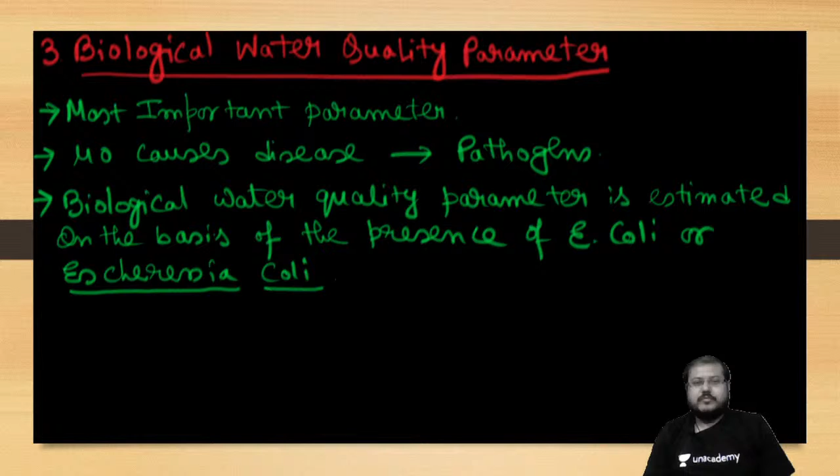एंड सेकेंडली एक पॉइंट है कि अगर इकोलाई जैसा दोस्त इस सैंपल में है, तो दुश्मन कोई भी रह सकता है। वाटर इज फिट या नॉट फिट फॉर ड्रिंकिंग। एंड थर्ड एंड मेजर पॉइंट इज, अगर आप पानी का टेस्ट करेगा डिफरेंट माइक्रो ऑर्गेनिज्म के लिए, वो चीज उसके लिए भी खतरनाक है। Any touch or anything can happen, and it can cause that the pathogen has entered the body of that particular person and he or she is getting infected by that pathogen. इकोलाई टेस्ट करने में नेगेटिविटी है ही नहीं, क्योंकि E. coli is friend to mine and ours, and friend to our body itself.

There is a definition of E. coli present. E. coli is coliform, facultative, non-pathogenic, gram-negative, rod-shaped bacteria present in every warm-blooded animal intestine. Presence of E. coli is actually indicating that the water may get infected by microorganisms.

That is why E. coli is also called as indicator microorganism. The presence of E. coli is indicating whether other microorganisms are present or not. That's why E. coli is also called as indicator microorganism. So lot many properties are provided here.

Now see, coliform, facultative, non-pathogenic, gram-negative, and rod-shaped bacteria. So lot many properties are present. So let's see, first of all, coliform.

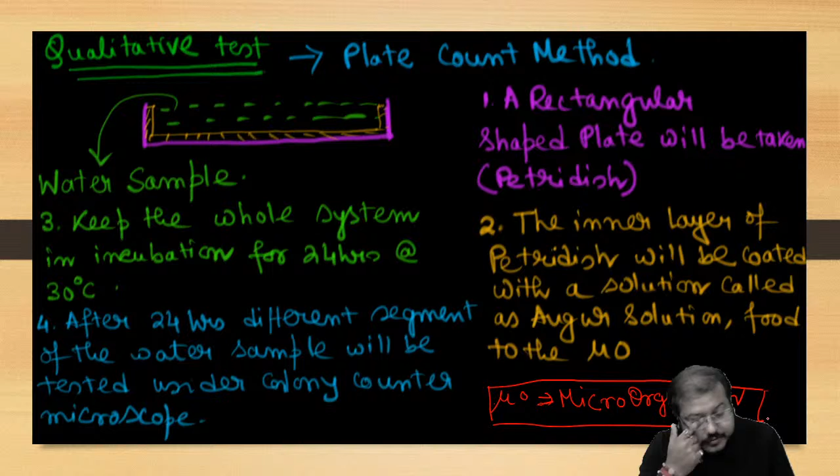That is called agar solution. Then after that, we put in the water sample which we want to test.

Then we keep the whole system in incubation, meaning an undisturbed condition, for 24 hours at 30 degrees centigrade.

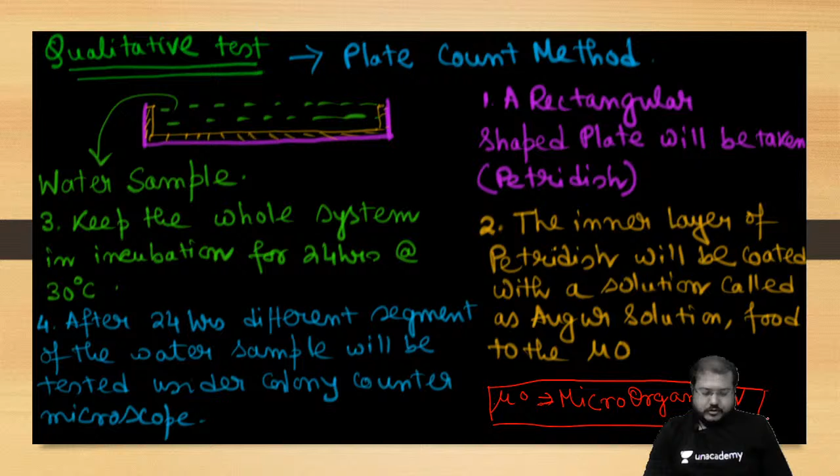In that colony counter microscope, if you observe any kind of dot - blue, black, purple, or brown - then your answer is yes, E. coli is present in the system. If no dots are present, then your answer is no, E. coli is not present in the system.

So: blue, black, purple, brown dot observed means yes, E. coli is present. No dots observed means E. coli is not present. That is the qualitative test.

Generally, the quantitative test of E. coli - try to understand this in detail, because you will get questions from the last segment of this test. If you don't understand the process, solving the question will not be simple. In the quantitative test, it is done by the multiple tube fermentation test.

What is multiple tube? Why is it called the multiple tube fermentation test? I will tell you.

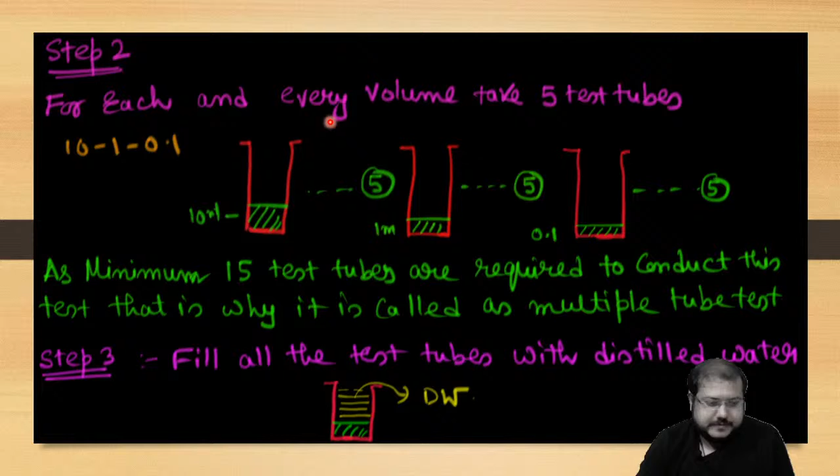Minimum 15 test tubes are required to conduct this test. And that's why it is called as multiple tube test. Why it is called as this fermentation test, I will tell you later. But minimum 15 test tubes are required to conduct this test. That is why it is called as multiple tube test. Okay, that is step. Is that clear?

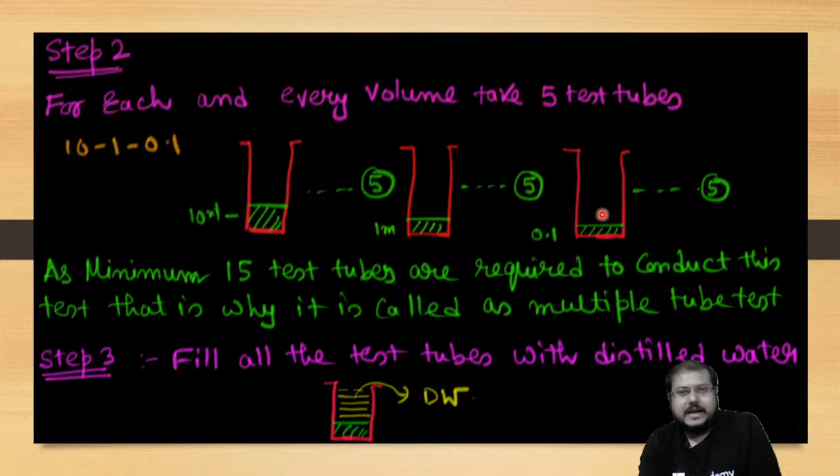Distilled water, 0.1 ml sample means 99.9 ml will put distilled. Clear?

Now, after that, each and every test tube, we are going to add 4 to 5 drops of fructose solution, mixed in each tube, and the mouth part will be closed by cork and Vaseline.

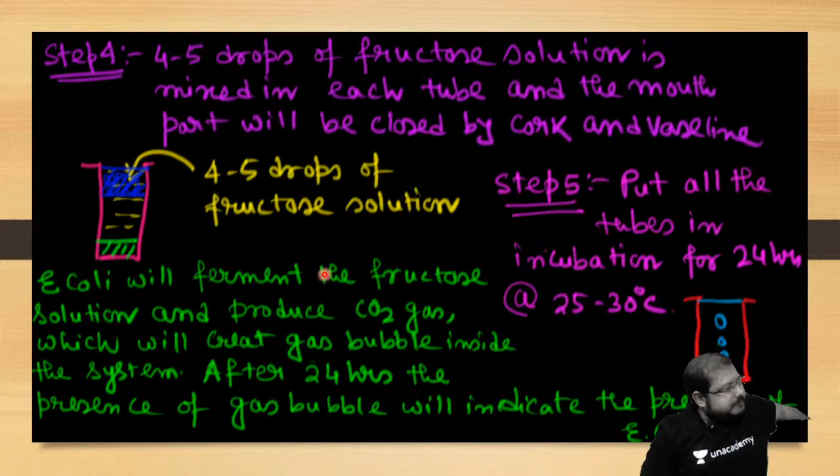In every test tube, 4 to 5 drops of fructose solution will be added, and after that the mouth part of the test tube will be closed by cork and Vaseline. Here.

Finally, what will happen? We will keep all the test tubes in incubation for 24 hours at 25 to 30 degrees centigrade. 25 to 30 degree centigrade.

What will happen? E. coli will ferment the fructose solution and produce carbon dioxide gas.

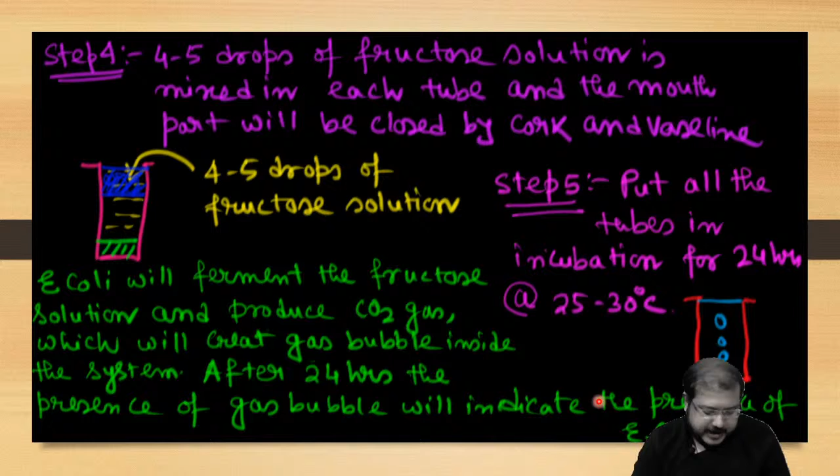These gas bubbles actually indicate the presence of E. coli. So after 24 hours, in the test tubes where we observe carbon dioxide gas bubbles, E. coli is present, else E. coli is absent in the test tube. Clear? So in multiple tubes, we are actually enhancing the fermentation, and we are finding out whether E. coli is present or not.

That's what is called as multiple tube fermentation test. Now, the final step, a table will be generated, a result representation table, to showcase the result.

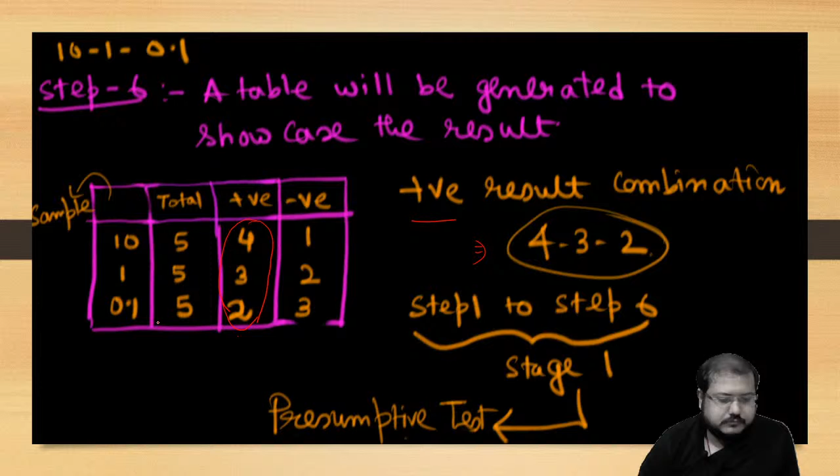That is a number. What is the highest possible permutation? That is 555, and lowest possible is 000. So in this table you need to find out where is your positive combination value. Here is 432. Suppose the corresponding value is 100. So your final answer will be represented by most probable number, MPN.

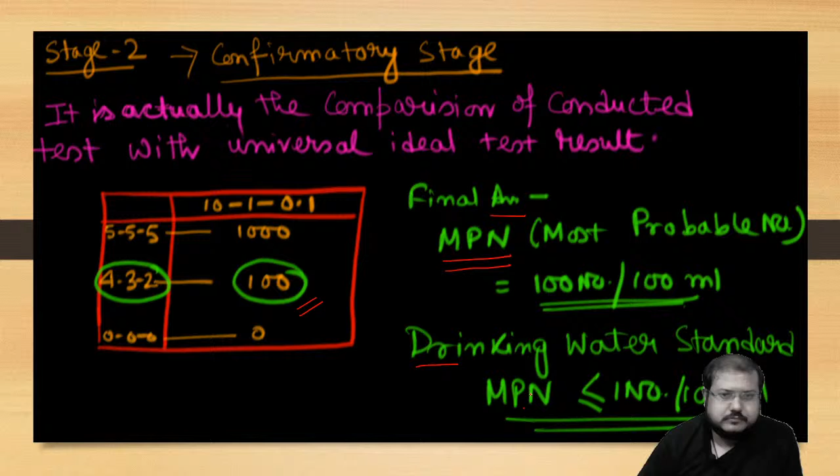Now, we need to understand two special cases. First is when test volume is not matching with the table volume.

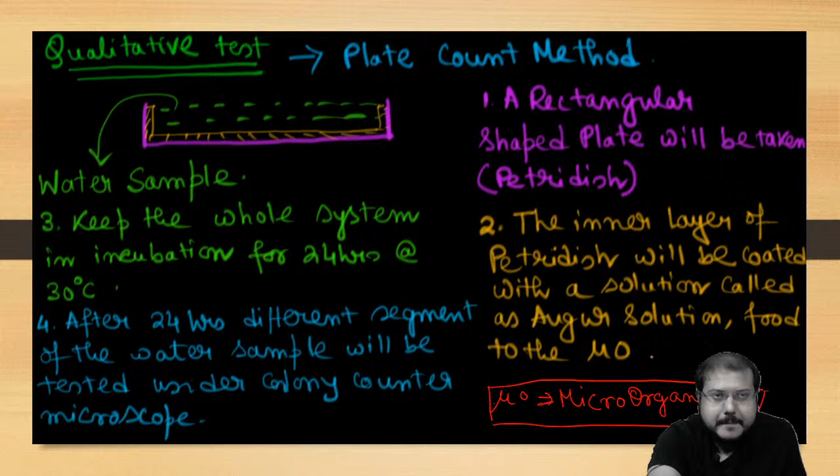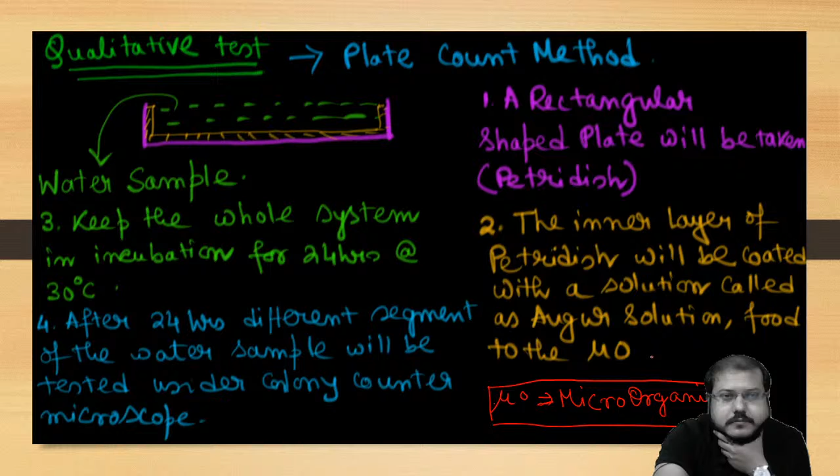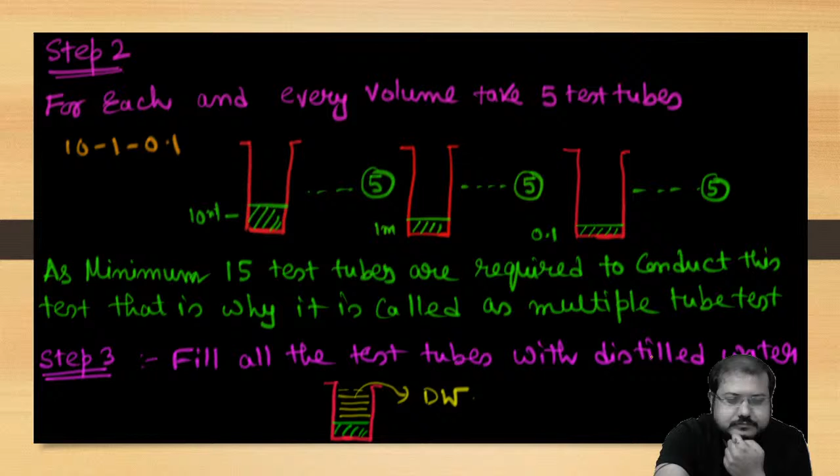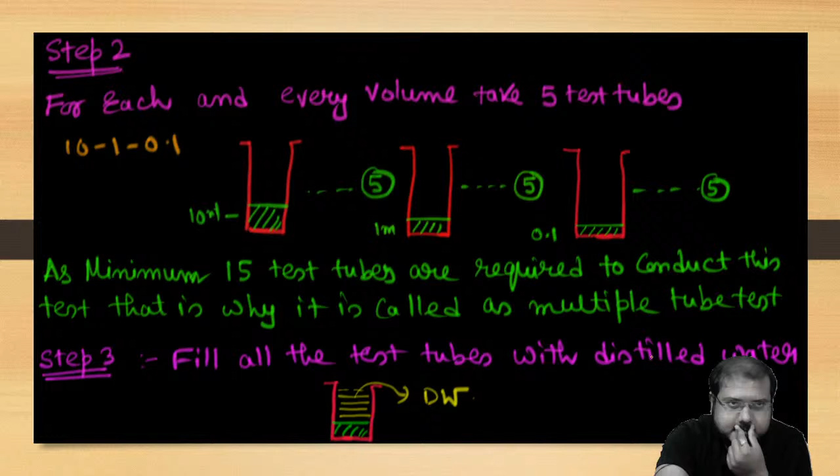That is what we have covered. Just going for the first ones: biological water quality parameter. We are going for the test for E. coli. What E. coli is, is described here. Then the properties are described here. What is the quantitative test? Confirmatory stage of the quantitative test.

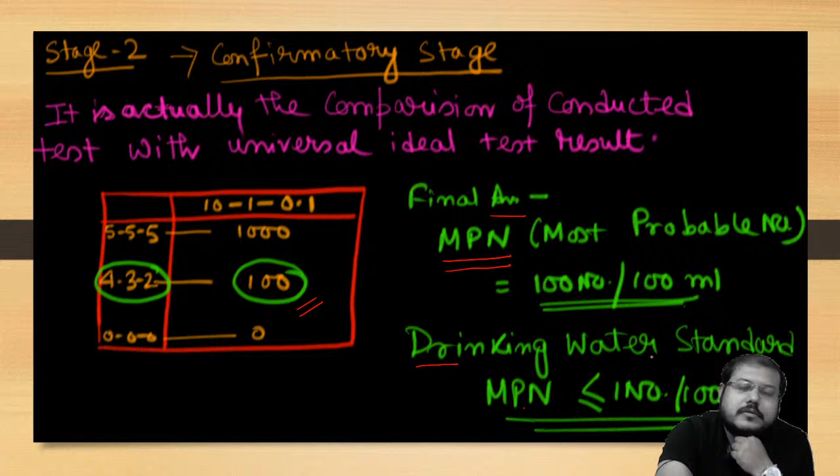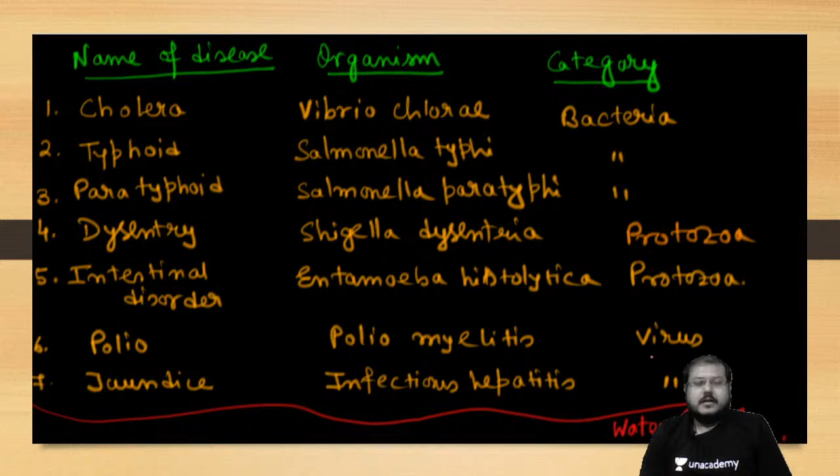Now, finally, there is a list of the disease, organism, and category. Cholera, Vibrio cholerae, category bacteria; typhoid, Salmonella typhi, bacteria; it's not all, just the normal ones. Paratyphoid, Salmonella paratyphi, bacteria; dysentery, Shigella dysenteriae; protozoa, intestinal disorder by Entamoeba histolytica.

Polio is caused by poliomyelitis virus, jaundice is infectious hepatitis by virus. These are a very small list of waterborne diseases, organisms, and their categories. That is the end of biological water quality parameter.

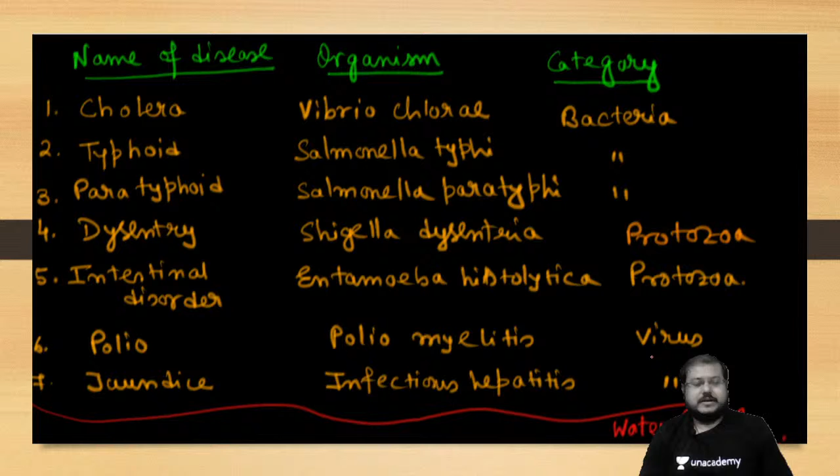Now we will start discussing the main topic for today, that is treatment. We will start the treatment of water. Quality checking हो चुके हैं. Now we have to treat the water, and the first thing we will go for is the plain sedimentation process. Before going to the plain sedimentation process, we need to discuss the prelude of this chapter.

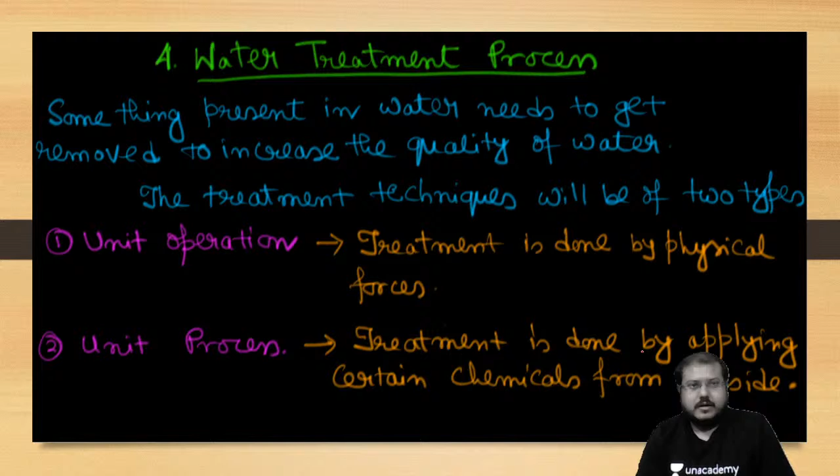Another one is unit process, where the treatment is done by applying certain chemicals from outside. We will see different treatment techniques and identify which are unit operations and which are unit processes. तो हम लोग treatment में घुस चुके हैं. That is a major segment; lots of things are there. The theoretical concept is important as well as the mathematical. So something present in water needs to get removed to increase the quality of water. The treatment techniques will be of two types: unit operation and unit process.

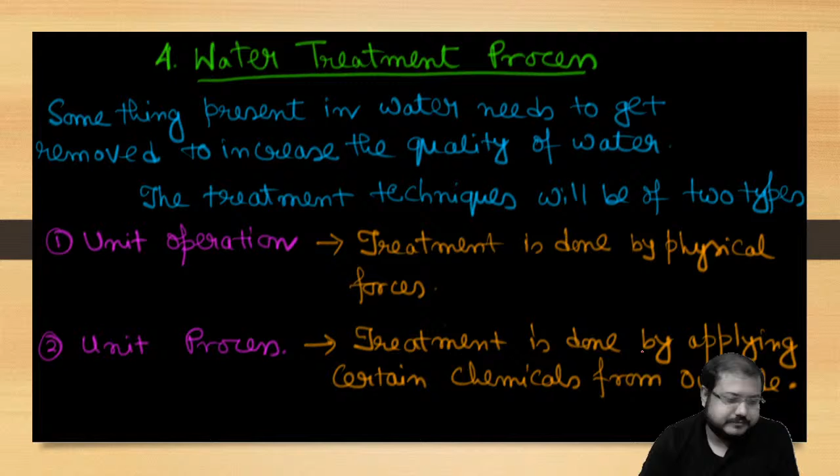Now, before going to the details, हम details में जाने से पहले कुछ चीजें हमको याद रखना पड़ेगा: that we are more concerned in the domestic water supply part. We are more concerned about the quantity than the quality.

अगर हम क्वालिटी को कुछ जगह पे नजरअंदाज करेंगे, क्वालिटी को कंप्रोमाइज करेंगे for a better quantity treatment, or we can say that we will sometimes skip the quality parameter to get a good quantity of water. Good means हमको volume ज्यादा जरूरत है.

And please keep in mind, whatever we are going to discuss is the most basic and ideal treatment sequence and phenomena.

वास्तव में बहुत जगह पे it will be changed, it can be modified, it can be altered depending on the source water quality. Once again, I'm telling you, whatever we are going to discuss is the most basic and ideal approach. Okay.

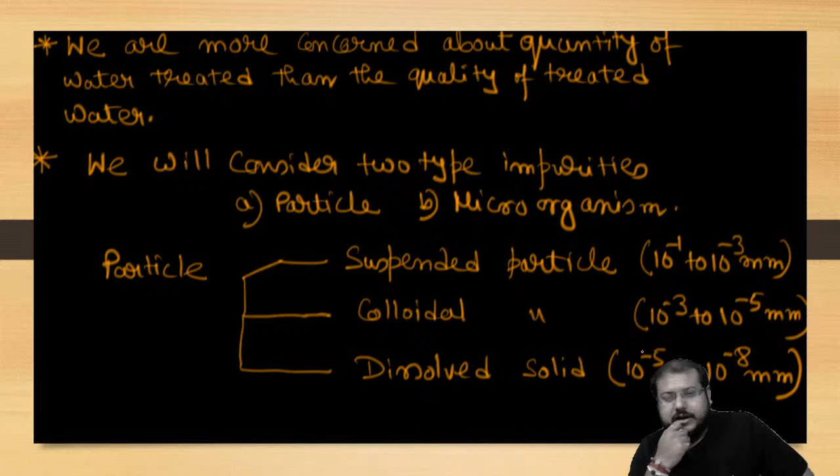This raw water will undergo the current treatment scheme. Number one, plain sedimentation, number two, coagulation and flocculation, then it will go to filtration, then to disinfection, and finally it will get supplied. So the first process will be plain sedimentation, then coagulation flocculation, then filtration, then disinfection, and then it will be supplied.

So see, first, plain sedimentation is used to remove the suspended particles. Second, coagulation and flocculation will be used to remove the colloidal particles. Third, filtration will be used to remove the dissolved solids, and finally disinfection will be used to remove microorganisms. As I told you previously, we will only consider particles and microorganisms as the impurities. That's why all types of particles and microorganisms are dealt with in this treatment scheme.

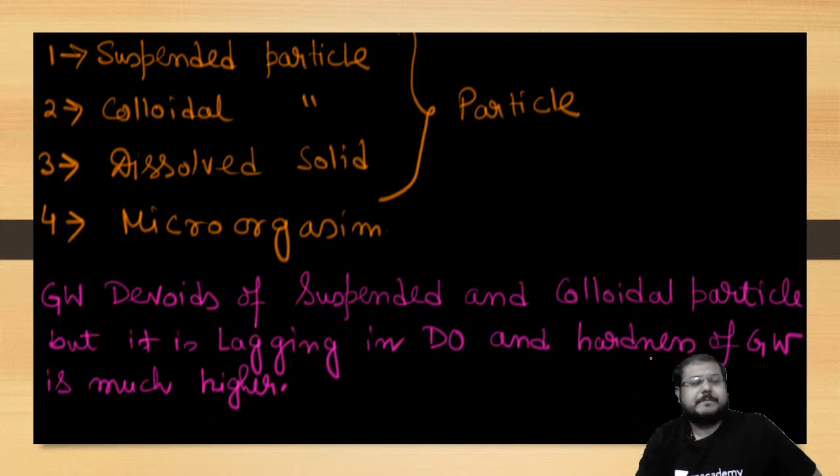The groundwater treatment scheme will be different. Aeration will be first, then water softening, then filtration, then disinfection, and then finally it will get supplied.

First will be the aeration technique. Aeration is actually aerating the water, that means putting extra oxygen into the water. It targets the dissolved oxygen part. Water softening is actually the removal of hardness. So see, aeration will put extra oxygen and remove carbon dioxide and H2S gas.

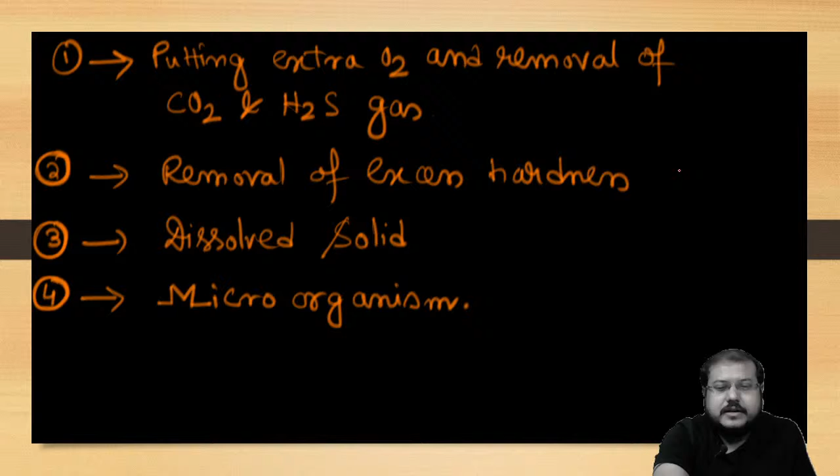Removal of hardness will be done by the water softening process. Filtration will handle dissolved solids, and disinfection microorganisms. These 3 and 4 are already discussed. So that is the treatment scheme of surface water, and this is the treatment scheme of groundwater. Clear?

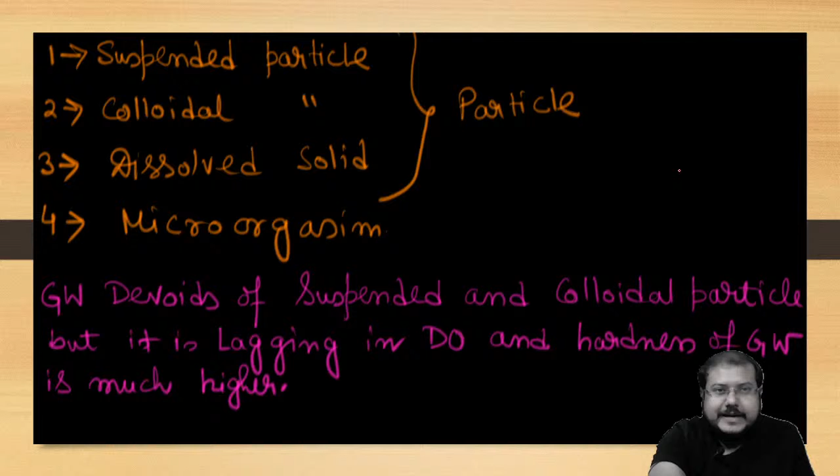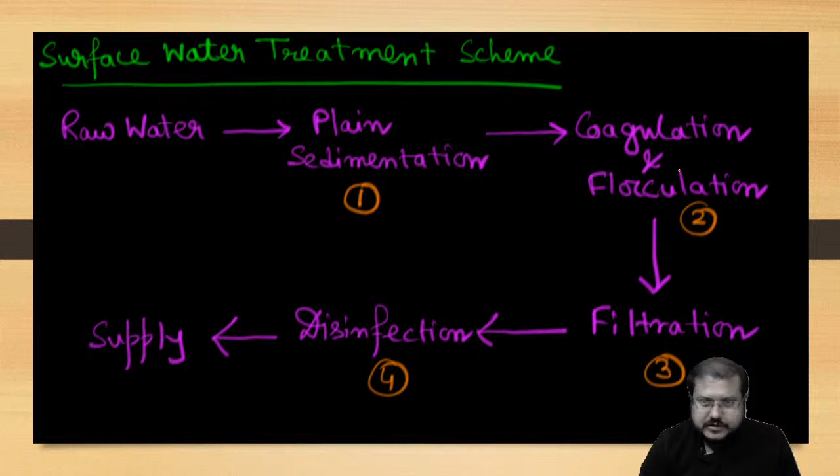So in our treatment of water chapter, these are the different segments we will discuss. First we will discuss plain sedimentation. Second, coagulation flocculation. Third, filtration. In the fourth segment, we will discuss disinfection. And finally, there will be another chapter called miscellaneous treatment process, where we will briefly discuss the aeration technique, the water softening technique and some other techniques.

So there are five segments for this water treatment process. First is plain sedimentation. Second will be coagulation flocculation. Third will be filtration. Fourth is disinfection, and fifth will be miscellaneous treatment, where the groundwater treatment process will be discussed briefly. Okay. Now we are entering the first segment of this treatment process, the plain sedimentation process.

Plain sedimentation is the process of dealing with suspended solids that I have already told you about. Generally, suspended solid size ranges between 10 to the minus 1 to minus 3 millimeter in diameter. Yeah, plain sedimentation. Just try to see.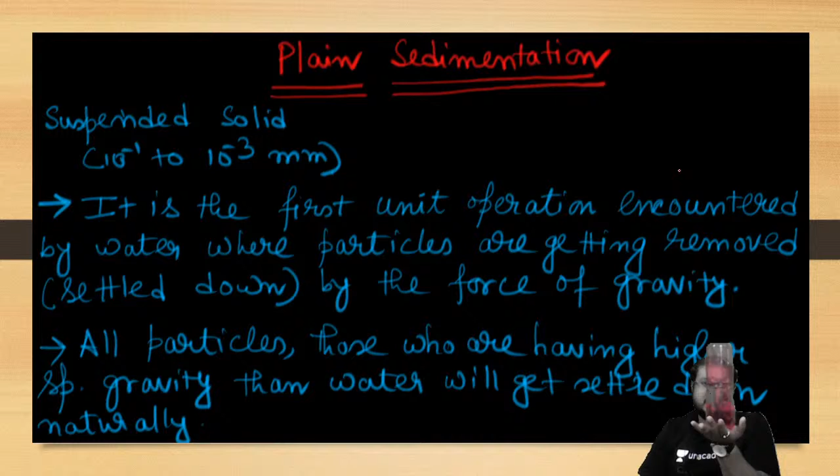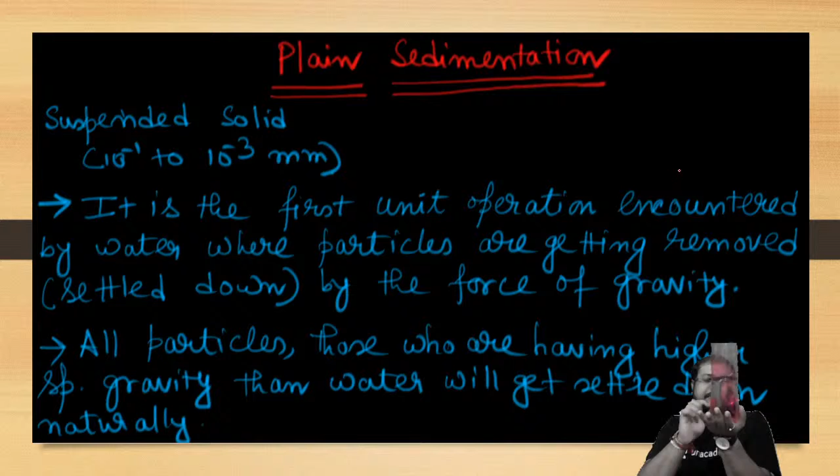What will you observe? You'll observe that after a certain amount of time, maximum of the suspended particles will get deposited in the bottom layer of this particular bottle, and from the top you are going to get suspended-particle-free water. So what is happening here?

Particles which are having higher specific gravity than water are getting settled down naturally. No chemicals are getting used from outside. Nothing else is happening. So eventually, it is a unit operation, and particles are getting settled down by the force of gravity. It is the first unit operation encountered by water where particles are removed by the force of gravity. All the particles having higher specific gravity than water will get settled down naturally.

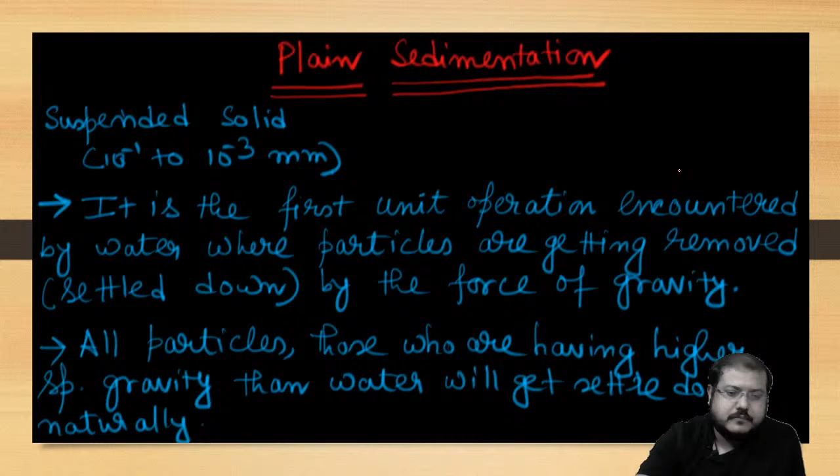Natural sedimentation of particles is opposed by water itself, by turbulence and viscosity of water. The natural sedimentation of particles is opposed by turbulence and viscosity of water. Higher velocity, turbulence.

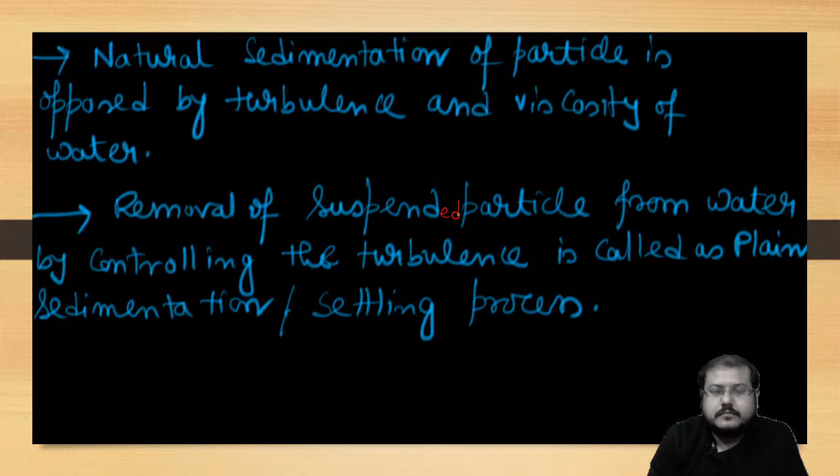What we will do, we will remove the suspended particles from water by controlling. Our job is to control the turbulence, and particles will get settled down naturally by themselves. It is also called the settling process, sedimentation process or settling process. So removal of suspended particles from water by controlling the turbulence is called plain sedimentation or settling process.

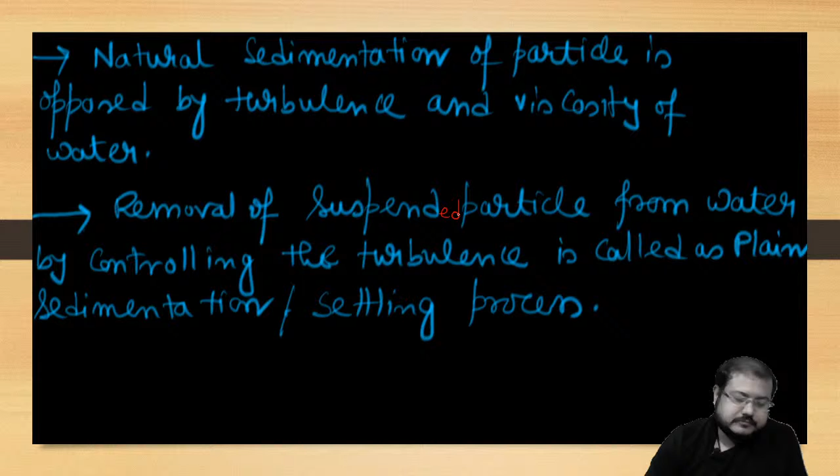So what we are actually doing is controlling the turbulence of water so that the settling process of particles gets enhanced. Generally, in the whole world of water treatment, four types of settling process are observed.

First one is the type 1 settling process, also called discrete settling. What is that, we will discuss. Type 2 settling process, called flocculent settling. Type 3 settling process, called hindered settling, and type 4 settling process, called zone settling or compression settling.

Among these four types of settling process, type 1 and type 2 settling we will read in detail in this domestic water supply engineering, whereas type 3 and type 4 settling we will see in wastewater treatment. Type 1 we will see right now, and type 3 and type 4 settling we will see in wastewater engineering.

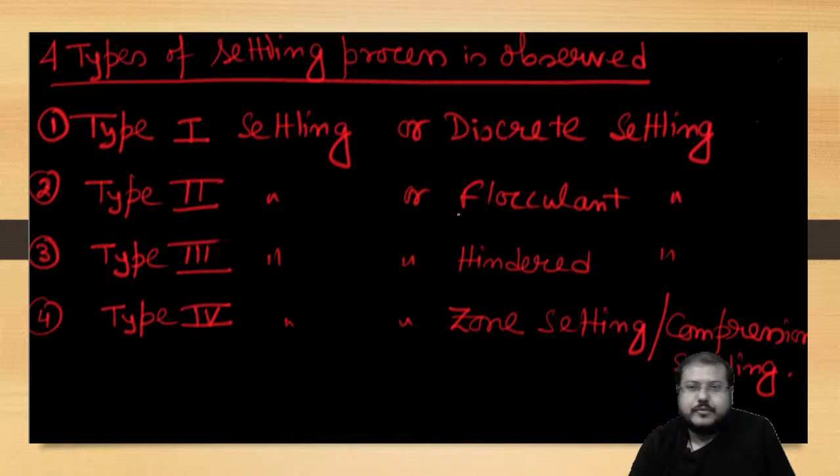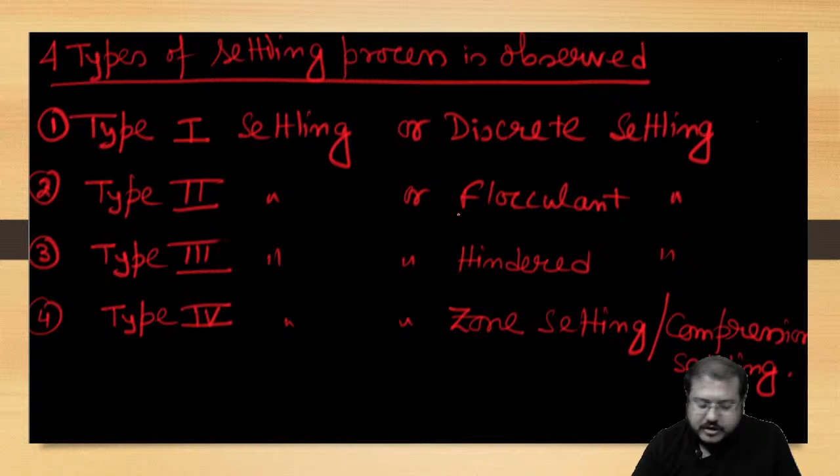Type 1 settling is concerned with discrete particles. It is called discrete settling because it is concerned with those particles which are called discrete particles. What is called a discrete particle?

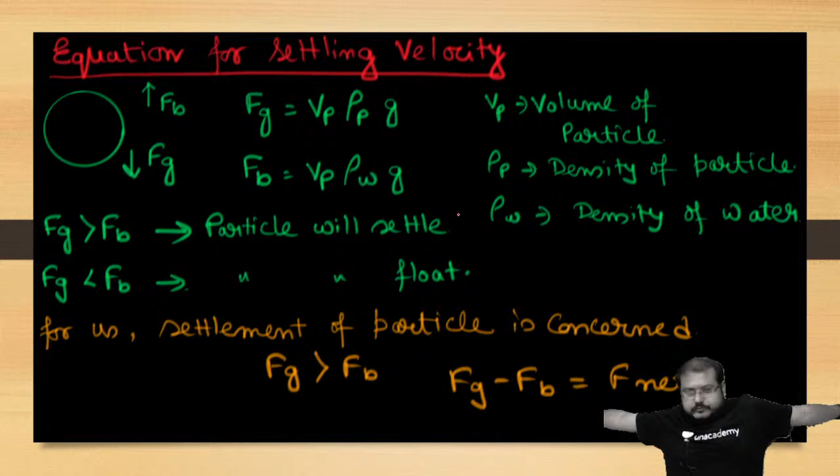Now we need to know what will be the equation for settling velocity, at what velocity particles are going to get settled down.

To find out the equation for settling velocity, one spherical particle, the ideal one, is concerned. When the particle is in water, two types of forces will act: this one is gravity force, which will want to take the particle in the downward direction, and another one is buoyancy force.

What is gravity force? Force is mass into acceleration. Mass is volume into density, so gravity force will be equal to Vp into rho p into g, where Vp is volume of particle, rho p is density of particle. For buoyancy force, Fb will be equal to volume of particle into rho w, density of water, into g.

Now, if Fg is greater than Fb, if the downward movement is more than the upward force, then obviously the particle will come down towards the bottom of the process, flow, or tank, whatever it may be. Then the particle will settle. But if the upward direction motion, if your buoyancy force is more than gravity force, then the particle will float.

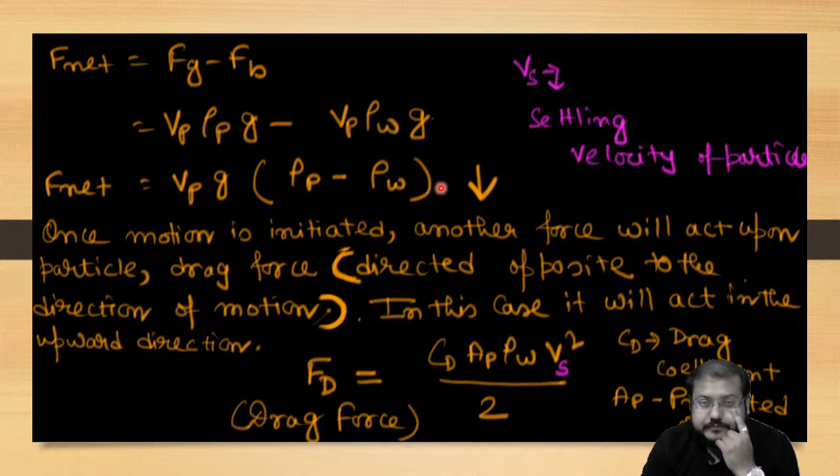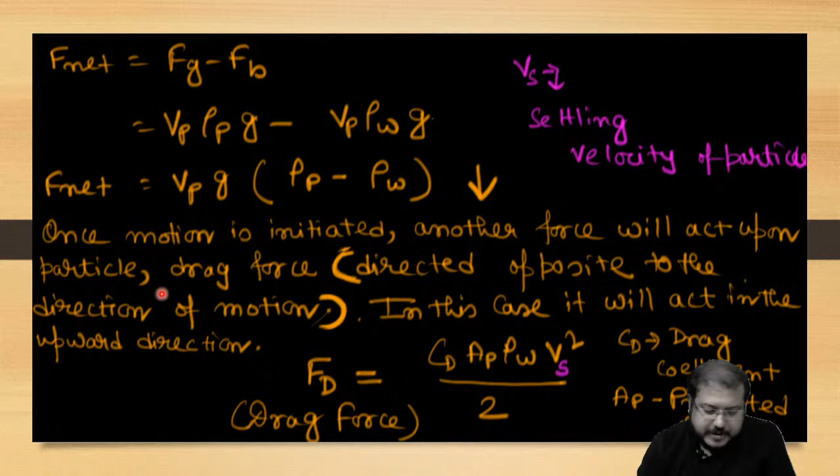Now, once motion is initiated, another force will act upon the particle. What force? Any solid particle present in any fluid, if motion is initiated, that force will occur. That is called drag force. And what is the direction of drag force? The drag force will always be there, opposite to the direction of motion.

Because there is no fixed direction. If this particle goes upward, floats, then drag force will act in the downward direction. If the particle is getting settled down, that means drag force will act in the upward direction.

And the drag force is expressed as CD Ap rho W V square by 2, because CD is the drag coefficient and Ap is the projected area, rho W is density of water, and V is the velocity.

But why am I putting suffix S? Because we are concerned about the velocity at which the particles are getting settled down, that is Vs, the settling velocity of the particle. So Fd is equal to Cd Ap rho W Vs square by 2.

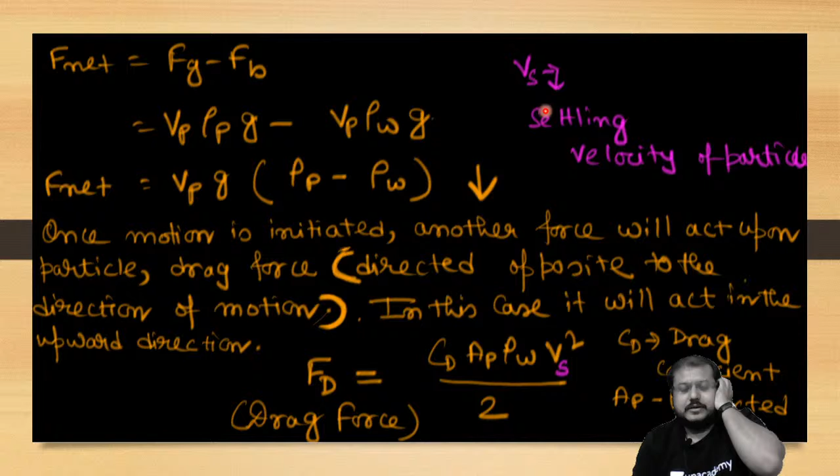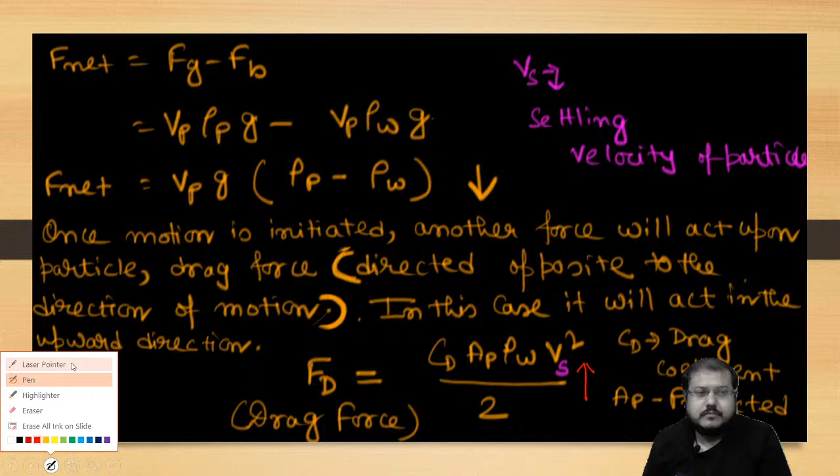So at equilibrium condition, your upward direction force will be equal to the downward direction force. The upward direction force here is Fd, because it is a drag force and it is acting upwards right now, since it acts opposite to the direction of motion. So this is the upward force, and the downward force is F net, which we have already calculated.

So at equilibrium condition, your Fd will be equal to F net. What should happen? If Fd equals F net, then Fd, which is Cd Ap rho W Vs square by 2, is equal to Vp into g into rho p minus rho w. What is Vs square?

Take the Vs on the left hand side and take everything on the right hand side. Vp into G into rho P minus rho W into 2 by CdAp rho W.

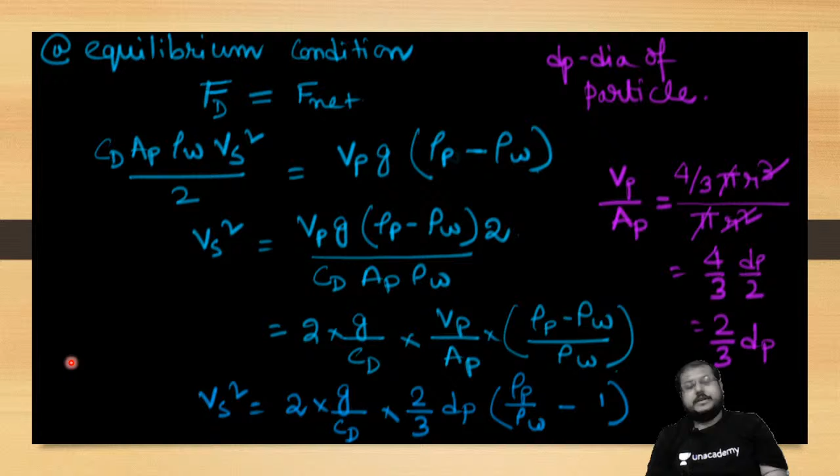That means Vp by Ap can be written as 2 by 3 dp. So let's go for this: 2G by CD, taking along Vp by Ap, rho P minus rho W by rho W. So V square will equal 2 into G by CD into Vp by Ap, which is 2 by 3 dp, into rho P minus rho W, rho P by rho W, just taking minus 1.

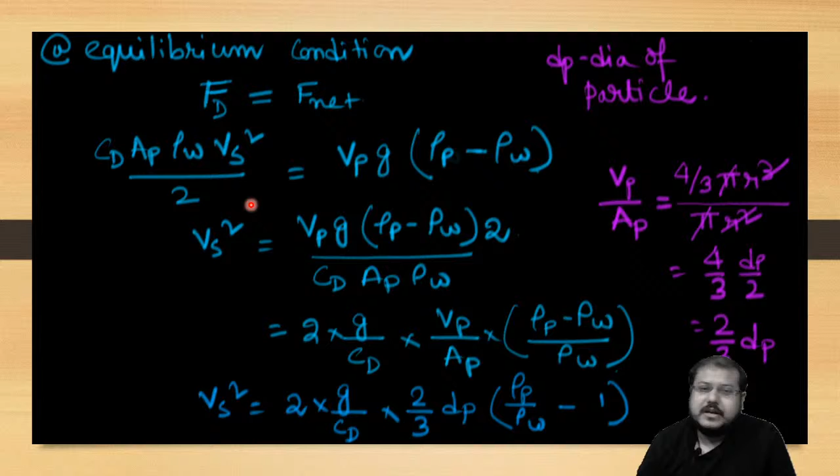Finally, what are we getting? Vs square equals 4 by 3 G dp by CD into rho P by rho W, which is the ratio of density of particle to density of water, called specific gravity. Here I am denoting it as capital G. You can denote it as capital S also according to your wish, but here I will follow the notation as capital G, specific gravity, which is rho P by rho W.

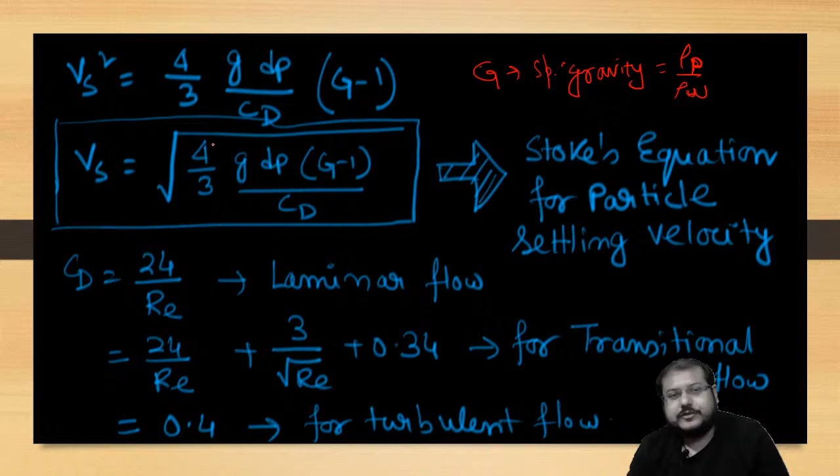So if it is the Vs square, then Vs equals the square root of 4 by 3 GdP into G minus 1 by CD. This equation is called the Stokes equation for particle settling velocity.

Where CD is called the coefficient of drag, and CD equals 24 by RE for laminar flow, 24 by RE plus 3 by root RE plus 0.34 for transitional flow, and 0.4 for turbulent flow.

What is RE? RE is nothing but the Reynolds number, which is the ratio between inertia force to viscous force, and it is nothing but rho Vd by mu.

For civil engineering, we need to remember RE for three things. One is for the particle: if RE less than 1, it will be laminar; if RE is between 1 and 10 to the power 4, it will be transitional; if more than 10 to the power 4, it will be turbulent. For pipe flow, RE less than 2000 is laminar, 2000 to 4000 is transitional, and greater than 4000 is turbulent. For open channel flow, RE less than 500 is laminar, 500 to 2000 is transitional, and more than 2000 is turbulent. These three things for civil engineering we need to remember for the RE value.

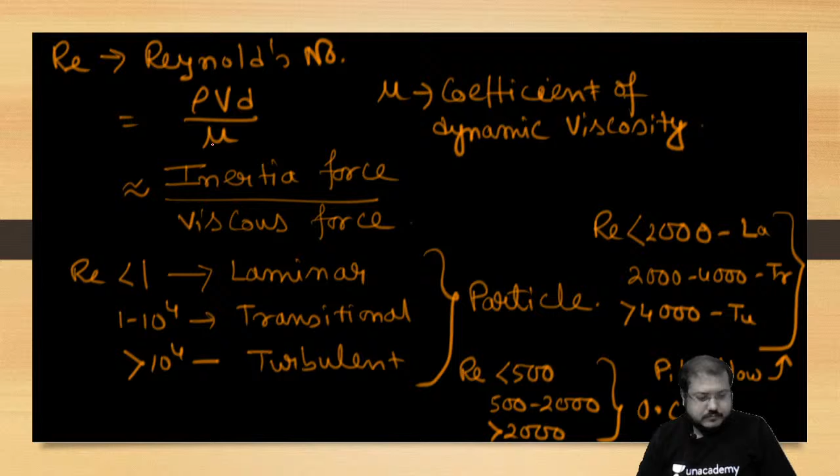For laminar flow, next let's see what will be the equation for settling velocity. For laminar flow, CD equals 24 by RE, and RE is rho W Vs dP by mu. We know the Vs squared formula, that is 4 by 3 GdP by CD into G minus 1.

If you put 24 by RE instead of CD, the solution is given here: Vs squared equals 4 by 3 GdP into 24 by RE, so eventually it's 4 into 6, 6 into 3, 18, so 1 by 18. And RE will go to the top, so GdP into RE into G minus 1. Now Vs squared will equal 1 by 18 GdP.

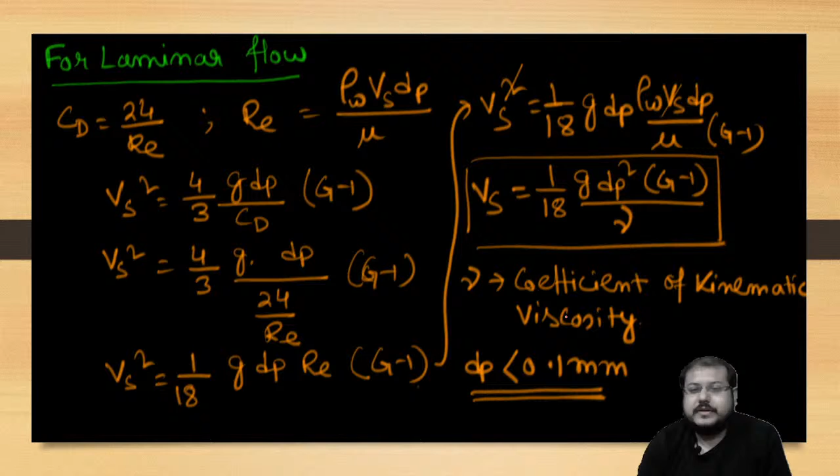What is RE? Rho W Vs dP by mu, into G minus 1. So one Vs and the Vs square get cancelled out, so Vs will equal 1 by 18 GdP square, because dP is multiplied with this dP, square into G minus 1 by nu. So Vs equals 1 by 18 GdP square into G minus 1 by nu. That is the equation for settling velocity in laminar flow condition. This equation is called the modified Stokes equation for settling velocity, where nu is the coefficient of kinematic viscosity, and dP, this is valid for particle diameter less than 0.1 mm.

This equation is called the modified Stokes equation for laminar flow, where Vs will be in meter per second, dP will be in meter, G will be in meter per second square, and nu will be in meter square per second.

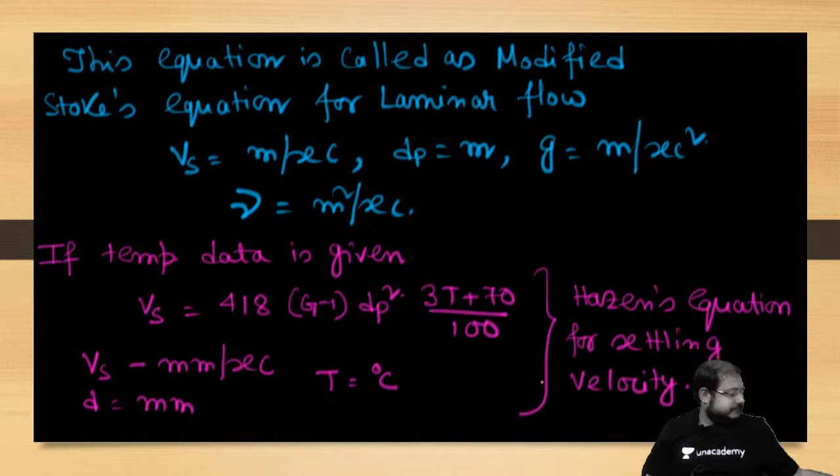Now in this process, we have seen that the viscosity data nu is given, and you are going for the modified settling Stokes equation for settling velocity. But if temperature data is given instead of viscosity data, then what will you do?

Then another equation will be used: Vs equals 418 into g minus 1, dp square, into 3t plus 70, by 100. Sorry, I misspoke, let me correct that.

Here Vs will be in millimeter per second, dp in millimeter, and T will be in degree centigrade. This particular equation is called Hazen's equation for settling velocity.

Now for transitional flow, recall laminar flow is where dp should be less than 0.1 mm. In transitional flow, dp should be greater than 0.1 and less than 1 mm, Vs equals 418 into g minus 1, dp, into 3t plus 70, by 100. Remember in the previous equation there is dp square, here there is just dp.

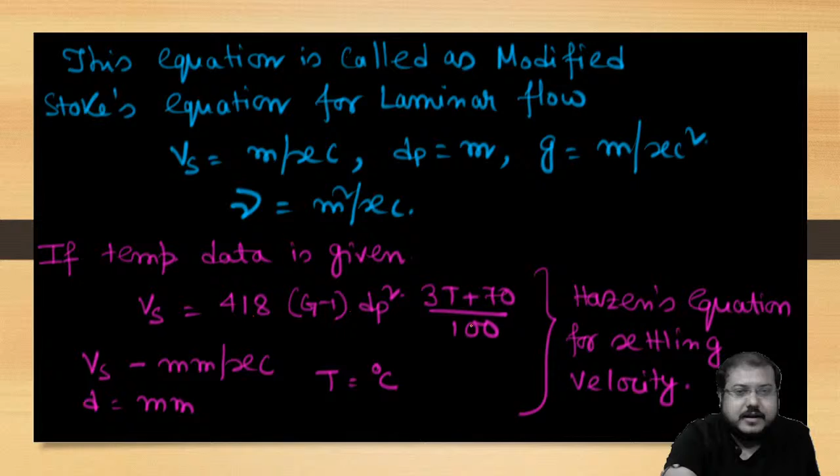So you need to remember this equation, where Vs will be in millimeter per second, dp will be in millimeter, and T will be in degree centigrade. Units are the same, and this equation is called the modified Hazen's equation for settling velocity.

Now finally, we are going for turbulent flow, where dp will be greater than 1 mm. Vs equals 1.8 into root of g dp into g minus 1. That is valid for any unit.

This equation is called Newton's equation for settling velocity.

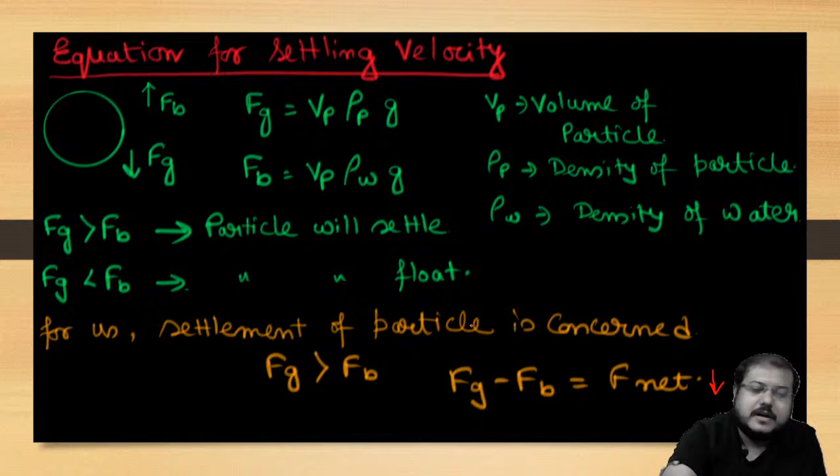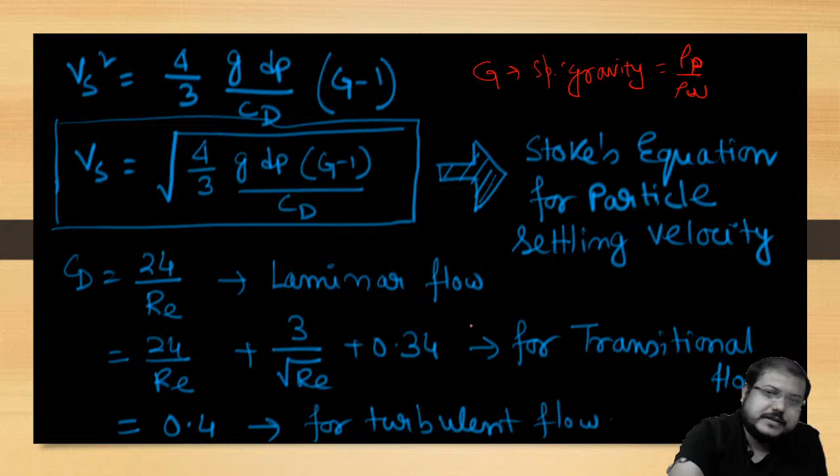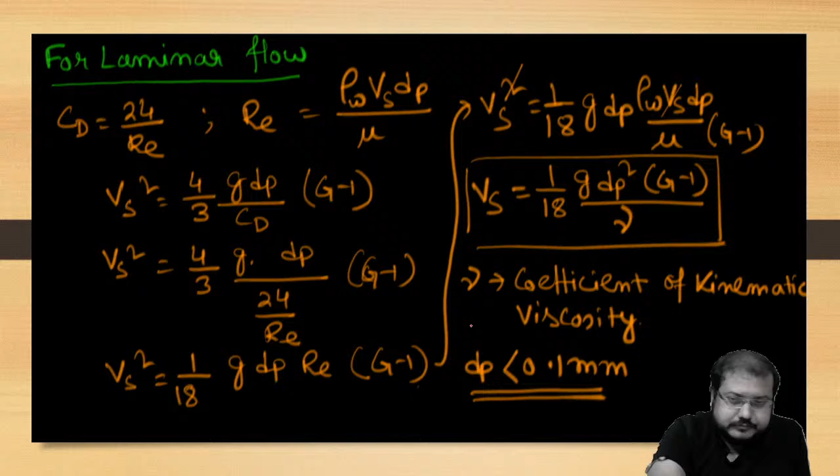So what else have we done for settling velocity? We have seen the derivation process, and then the ideal settling velocity, that is actual settling velocity by Stokes. We have gone through different conditions: the laminar flow condition with the modified Stokes equation, Vs equals 1 by 18 g dp square into g minus 1 by nu, which you will use with Reynolds number later on. We also covered Hazen's equation, modified Hazen's equation, and Newton's equation for settling velocity.

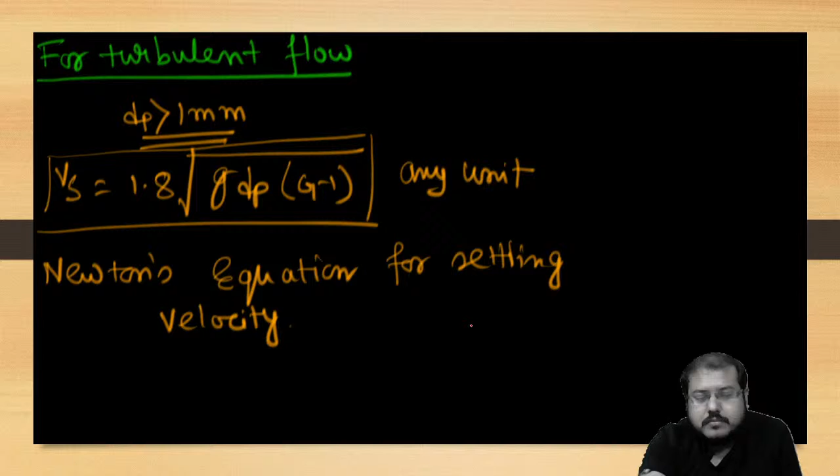Now for your better understanding, I've noted one question. Don't check the solution first. Find the terminal settling velocity of a particle of diameter 0.02 mm, with specific gravity 2.65 and mu equals 1 cp. I'm requesting you to note down the question and try to solve it for a minute.

Quickly, you can try to solve it: find the terminal settling velocity of a particle of diameter 0.02 mm with specific gravity 2.65, mu equals 1 cp. I'm giving you some time, don't see the solution. I'm deliberately telling you, don't see the solution directly, because it will not help you in the long run.

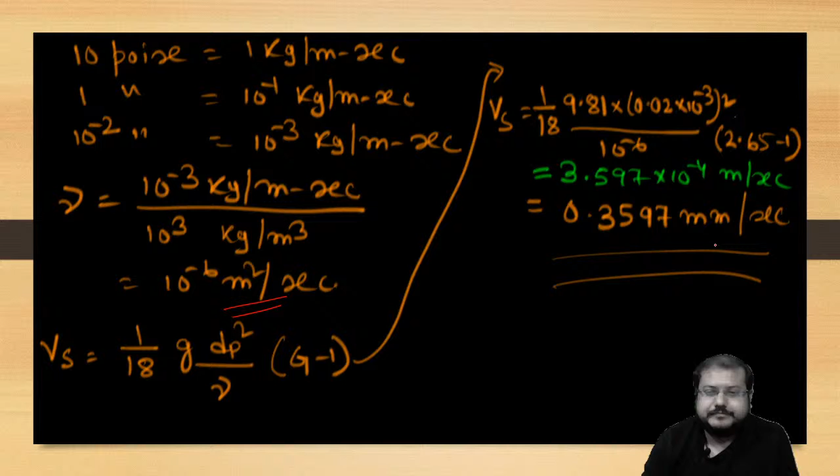Now we are going for the second question. Once again, I am repeatedly requesting you, don't go for the solution. First, you write down the question, try to solve. That's why I'm giving you some time and not directly going to the solution. Don't check the solution. Write down the question first. A particle of diameter. These are very, very basic questions. But the main point is you need to know the unit conversion and units itself. Okay.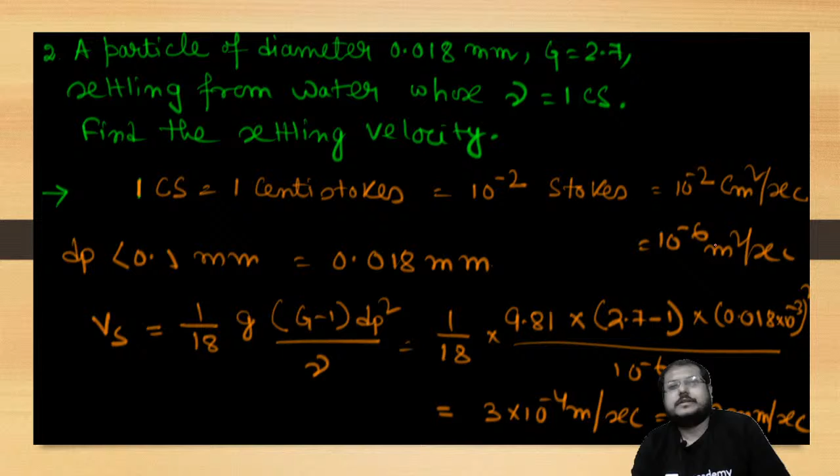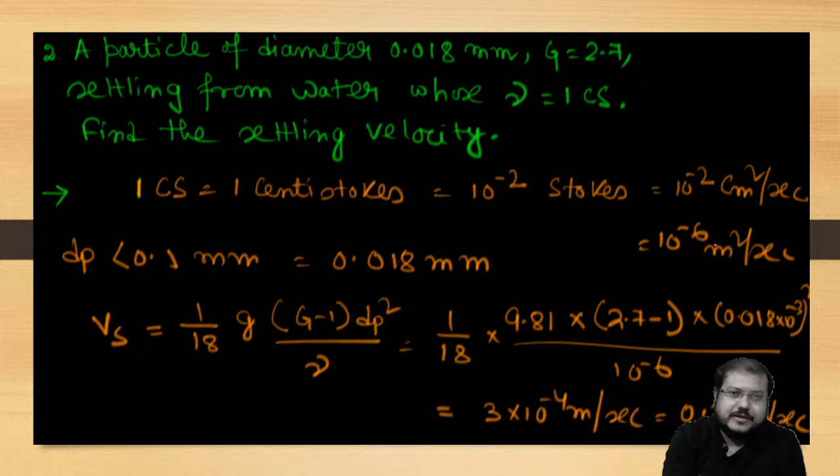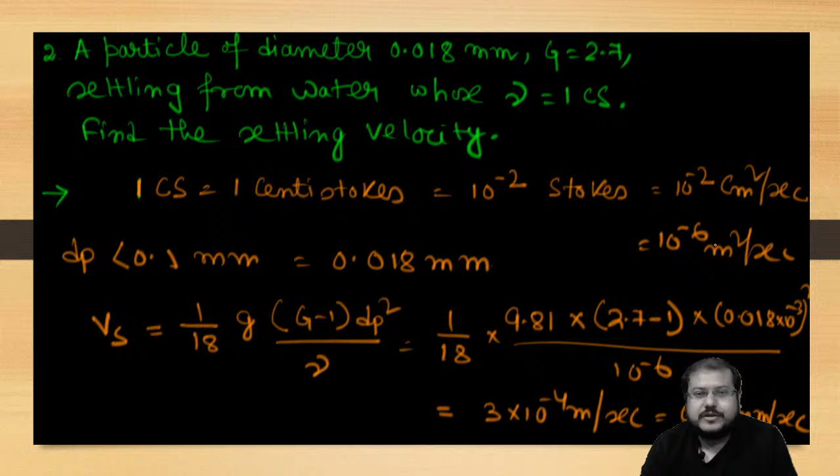A particle of diameter 0.018 millimeter, G 2.7, settling from water whose nu is 1 cSt, centistokes. Find the settling velocity. So 1 cSt means 1 centistokes, that is 10 to the minus 2 stokes, the unit of nu, kinematic viscosity. That is 10 to the minus 2 centimeter square per second. As we require it in meter square per second, it will be 10 to the minus 6 meter square per second. dp is less than 0.1 mm, where it equals 0.018 mm. That's why Vs, now you put all those values, you will get the answer 3 into 10 to the minus 4 meter per second, which is 0.3 mm per second.

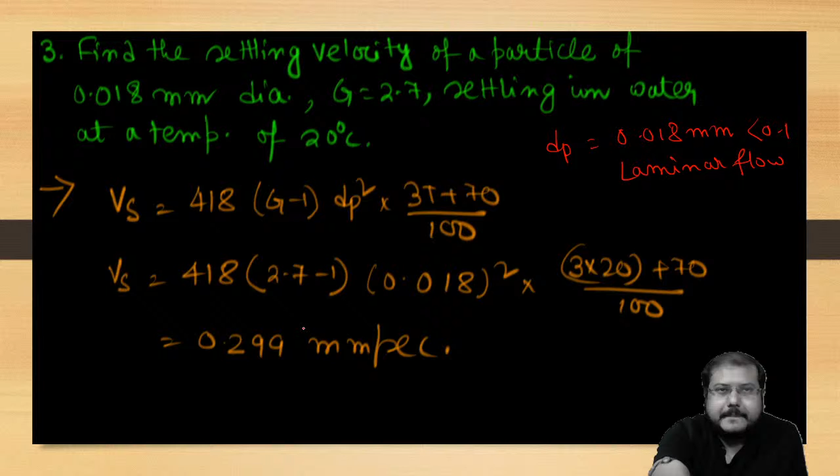So we have completed our discussion about settling velocity. In the next class we'll go for the plain sedimentation process, the types and the design parameters. We'll complete that segment.